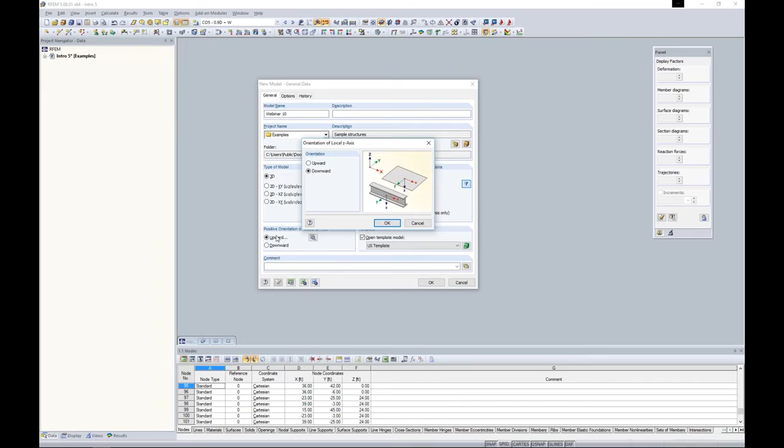The orientation of the global z-axis, that by default is set to upward for the United States install. That's typically what we work with here. And under this details, we'll want to make sure that our local z-axis is set to downward. This is more so important for concrete design. Otherwise, it really doesn't matter in the program. But I always suggest if you have the global z-axis upward to set this as downward for our local member axis.

Over here, we have the Create Combinations Automatically checked on. So when this is checked on, this is telling the program to automatically create these load combinations according to a specific standard that I select here in my dropdown. And this is where you can see that we have the ASCE 7 load combinations, IBC, we have the Canadian standard, as well as Eurocode and several other international standards.

When I have this checked off, then I can manually create those load combinations. They won't be automatically created for me according to the specific standard.

The template model down here is important because I think it's a very beneficial option. For me, I have this US template, and this just has the grid settings set up the way that I like, maybe my units. Perhaps I have some certain materials and cross sections that I use quite often.

Once I'm in RFEM, I can always go to File, Save as Template, and then that template will be available in this drop-down here. This is great for companies who maybe do a lot of similar structures and all start off with the basic type structure to begin with. You can model that basic structure and pull that up in your template model every time and then make further changes.

So now we're ready to jump into the program. So when we first open up the model here, we have our graphics view located in the center of the screen. So as we begin to draw elements within the model, this is where they will begin to appear.

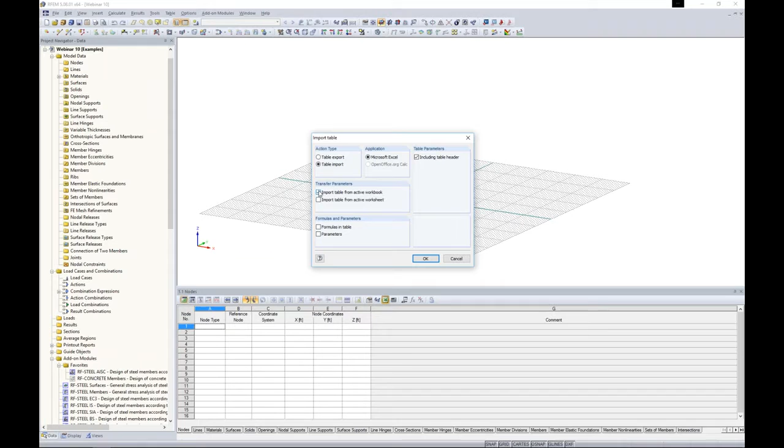For example, we can export this table for our nodes to get the basic layout with all of the correct columns. We can input our data in Microsoft Excel, maybe sort some different ways, and then we can import directly from Excel according to the active workbook and worksheet that maybe we're in the background.

A few other options that we have for modeling are, of course, all of our little tools up here, which we'll be using quite often today. We have our drop-down box up here. For example, we have all of the add-on modules listed according to the different categories such as steel, concrete, dynamics.

We also have the Project Navigator, and the Project Navigator is just another option to input your data. We will also view our results in the Project Navigator. This first tab down here called Data, this would be all of our input data, and here is our long list of add-on modules here.

So you can understand that we serve our customers with the add-on module concept because we really want to create software that caters to you and your needs, rather than charge you a very expensive software where you get all of these add-on modules regardless if you're going to use them or not. For example, you can see all of the different international steel codes that we have here, which probably most of the time users aren't going to be utilizing. So, as I mentioned, a very long add-on module list.

The display tab really controls everything that we're viewing graphically here, including our results after we run an analysis, as well as the input data. Our views tab looks pretty empty right now, but as we begin to generate our structure, this will allow you as a user to create maybe user-defined views, to view certain materials and sections quickly, rather than having to highlight and select them graphically.

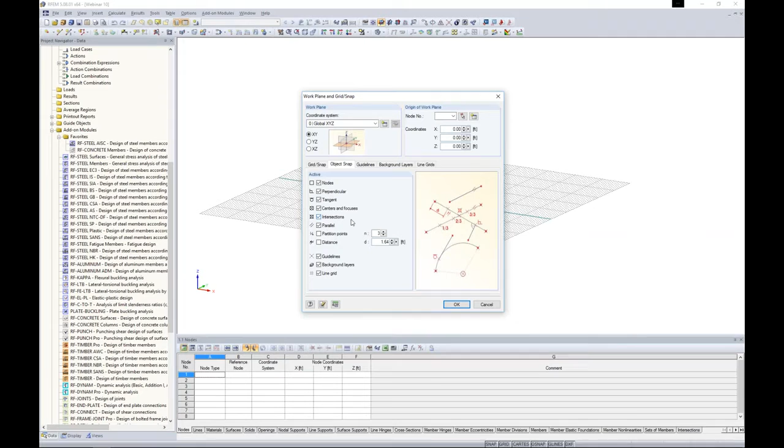This is the reason sometimes I tell users you're almost better off just starting modeling in our program rather than importing a DXF file, because it's easier that way, due to all these different tools that we have. But with that said, you can import DXF files too. For example, under the background layers tab is where we can import in this DXF. And what's nice about the different background layers is I can put multiple layers in here, so maybe I have a different layout for every level of a multi-level story building.

Well, I can go ahead and import in that DXF file at multiple elevations. The line grids option - if I create a new line grid here, you'll notice in the background that we have our typical 2D layout of our project grid. Well, this allows us to do a 3D project grid.

Down here at the bottom, you'll notice some different options that we have. For example, Cartesian, which is maybe more of a square, rectangular, 3D drawing grid. But we also have spherical, cylindrical, and incline. So this really plays an important factor, again, for these not-so-simple geometries that you may have, but you have different snap points in a 3D type environment that you'd like to utilize. Well, that's where these line grids may come in handy.

Under the grid snap settings, this is my current grid that I'm viewing here. Default when you do launch the program is this rectangular grid, but we can change this to polar if we'd like, if we're working with a circular type structure. And right now for Cartesian, I have 50 feet on either side of my origin, but I can also check this checkbox so that the project grid will actually grow with the structure, so it'll move dynamically according to the size of the model. Or if I shrink my structure down, that project grid will shrink down too, so I'm not always having to go back in here and change my settings to something bigger or smaller.

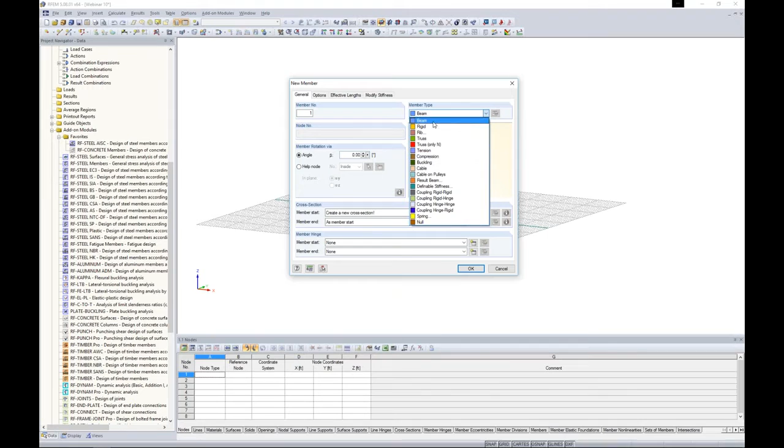And then because of our nonlinear capabilities, we can do things like cables or cables on pulleys. We can get into spring elements. So quite a few other options than just your typical application of a beam or a column.

But with that said, we will choose the member type beam and we'll create a new cross section. So launching our cross section library, you'll notice that we have our rolled sections where you'll find all of the sections from the CSA code, the AISC code, maybe aluminum sections from the ADM. These are all available in our cross section library.

But we also have these parametric thin-walled sections. We have massive sections for concrete. So you'll notice maybe in some other software you're really left with only a rectangular or circular type application for cross section.

But here we can utilize things like I sections, T sections, same with timber sections here. And we can even get into built-up type members. So we're not limited to just those sections directly from the codes, but we can really utilize a wide array of cross-sections here.

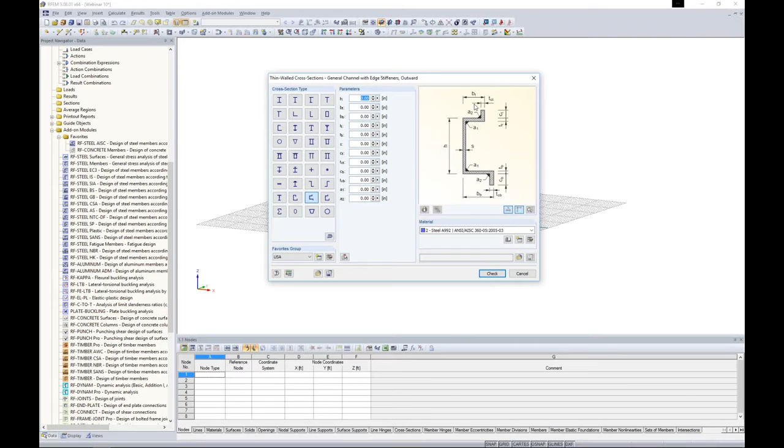For example, if I have an odd thin-walled cross-section here, all I need to do is to define my geometry, and then the program will automatically calculate the section properties for me.

We also have two standalone programs called Shape Thin and Shape Massive, and this is where you can import a DXF file, for example, and that will calculate the section properties for you, and then we can import them directly into RFEM. Those are standalone programs.

For today, we will go with a typical I section, and here is where we can use our filters on the left-hand side. From the first drop-down, you'll see that we have many different standards here. So that's great. If you do a lot of international projects, you'll have access to all these as well in RFEM. This is independent of any add-on modules.

Today, we'll be working with the AISC, and we want to first choose our W shape. Now, we have this long list of W shapes, which just comes directly from the AISC 2014. But perhaps you use a lot of the same sections and you don't really want to scroll through this long list every time to choose your specific W shape.

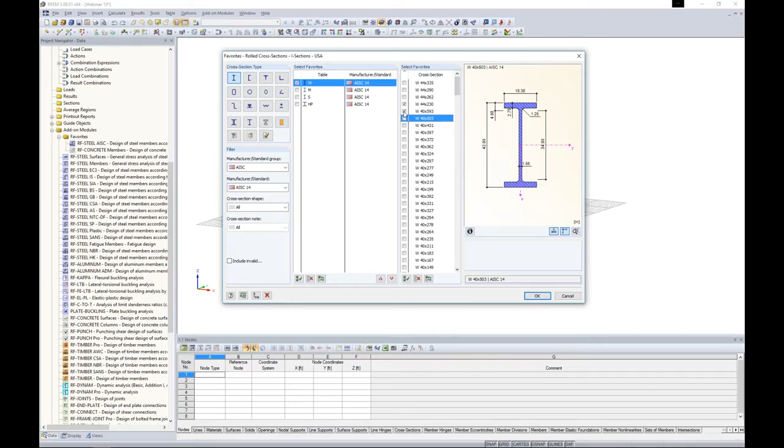Well, this is where we can utilize our favorites group. And with a favorites group, and I choose my edit button here, I can simply check on or check off maybe a set of sections that I use quite often. Then when I click OK and I activate this favorites group, then I'll have these sections available from a quicker list than having to sift through everything.

For today's example, I added a couple W shapes that I know I'm going to be using for this example. So now I have quick access to them.

We can also set the material in the same dialog box. You'll notice in this drop-down menu, the default when you open up RFEM is concrete F'C 4000, and we have steel A992. So for right now, we'll just utilize the default material in the program, but later on we'll have to add in some more materials to that.

The member hinge is set at fully fixed. So right now we will not add in any member hinge, but later on we will do this as well.

So now I'm ready to draw my first member. Well, typically when drawing the member, we need to change maybe our drawing grid and maybe snap to a couple different points. But another useful feature with this dialog box when I'm drawing a new member is to simply specify the length and the direction.

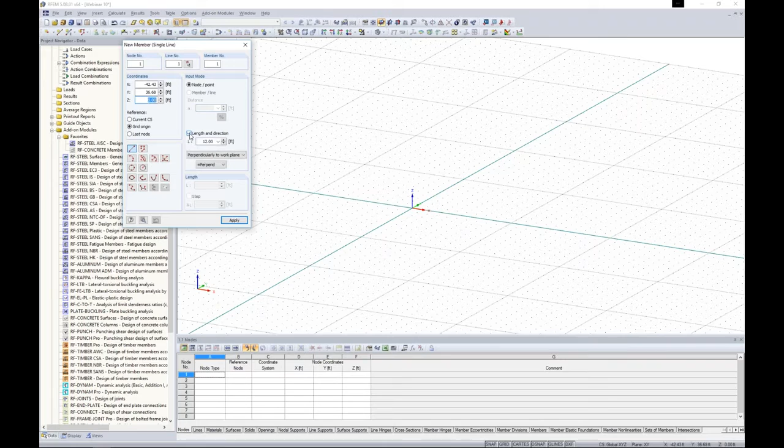So I can set the length to 12 feet here, and I want to draw it perpendicular to my work plane. So my work plane is set in the global X-Y plane. All I need to do is just to click on a couple points here to draw in my first columns. And now you'll notice that the orientation is in the correct direction and my length is set correctly too with that useful feature.

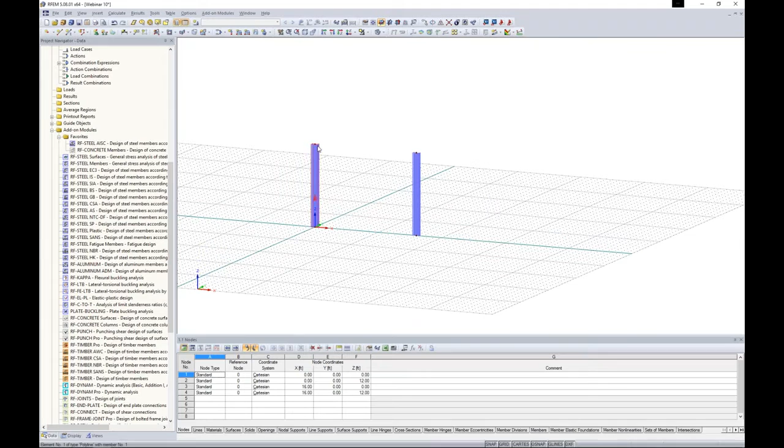The next thing to do is to draw a beam member connecting our two columns. So again, I'm just going to go to my Draw New Beam. I'm going to create a new cross-section. And once again, choosing a rolled cross-section under my favorites list, I'm going to choose a W12 by 40.

I just noticed I used a W12 by 40 here. That's okay, I wanted to actually use a different section, so I'll click on Edit Cross-Section and edit it here to quickly change that 12 by 40 to a 10 by 33. That's my column member, so now you'll notice my columns are 10 by 33 that I've already modeled in here.

My new member will be a W12 by 40. I want full fixity, so still no member end releases. Now I can snap to the top of those columns, and you'll see those green snap points pop up, related to those snap features I showed you when we first opened up the program.

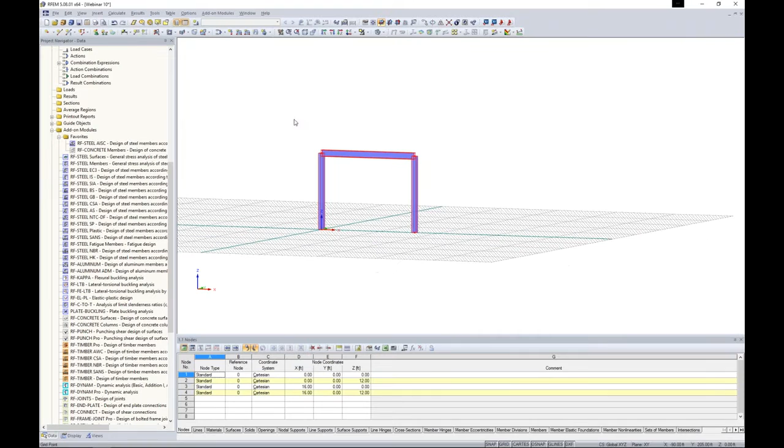So I want to create a couple copies of these. Rather than utilize the Move Copy tool, if I just highlight everything here and hold down my Control key, then we can utilize the drag and drop feature to quickly create copies of this member, additional couple stories here, just by holding down the Control key and dragging and dropping, and the program will do that automatically for us.

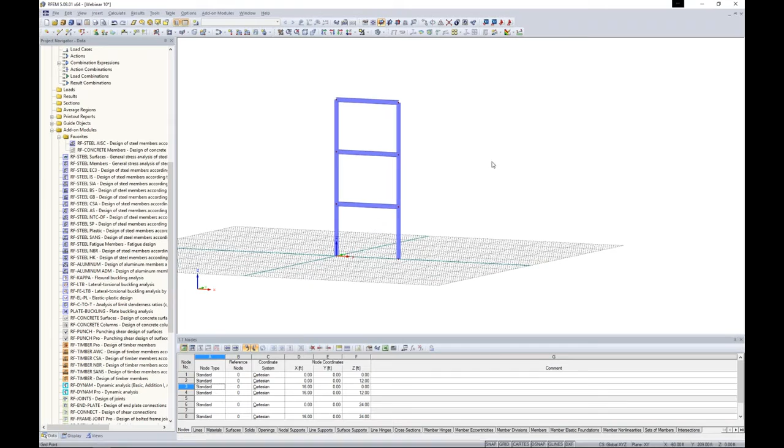Now the next thing I'd like to do is select all of these members, right-click under the Member option, and create nodes on lines with intermediate nodes. Here I'm going to add 2 intermediate nodes, and you'll see that this member is still a single continuous member. These nodes, if I double click, are of the type 'online' - you can see here we have either standard or online, so the program knows to integrate that directly into that member.

Now that we've added those nodes, I'm going to select everything above my bottom two nodes and utilize the Move and Copy tool here. I'm going to create two copies in the global Y direction of 16 feet. We have a special feature at the bottom of this dialog box called Edit Expanded Settings, so when I open up this additional dialog box, we can actually create lines in between our copy nodes, and even assign a member cross-section to those lines.

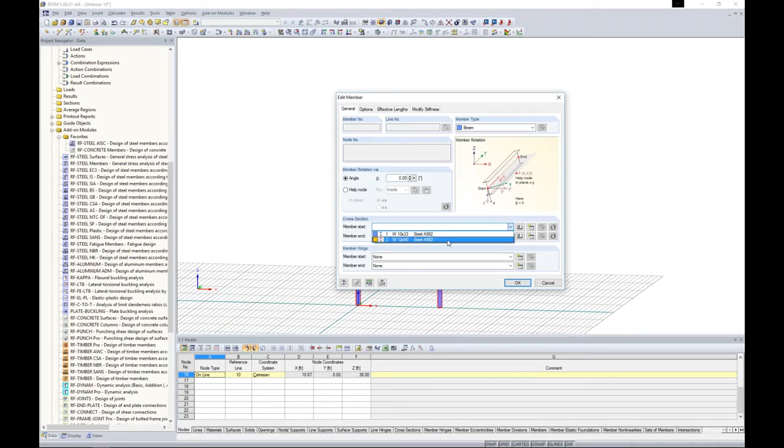Every cross-section or every member is composed of a line underneath it. Because we're creating members between these copy nodes, I want to choose a cross-section from my Edit Member dialog box. I've already defined the W12 by 40 previously, so now that's available in my drop-down box. I can click OK through all these dialog boxes, and now the program automatically created these beam elements between my copy nodes, so I don't have to sit there and draw in all of those additional beams.

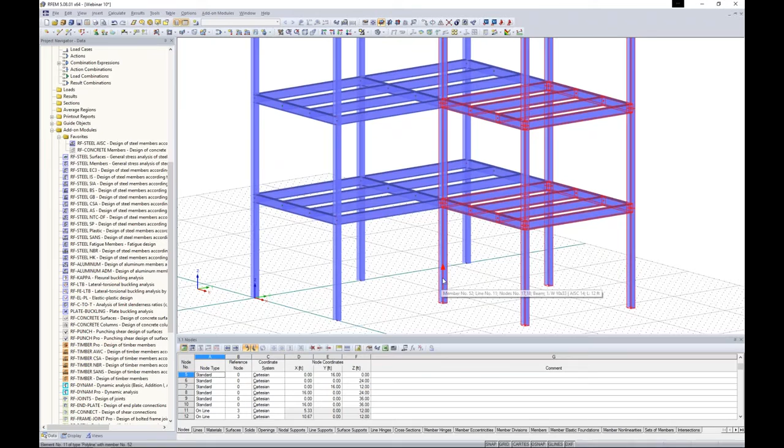Now I'm going to select this rear portion of my steel frame, and holding down my Control key again, I'll make an additional copy right adjacent to it. You'll notice that when I made that copy, I technically created a column on top of this column, but the program's smart enough to merge those together so we don't have any issues with duplicate members on top of each other - a nice feature of the drag and drop. So essentially, we have the basic structure for our steel structure here.

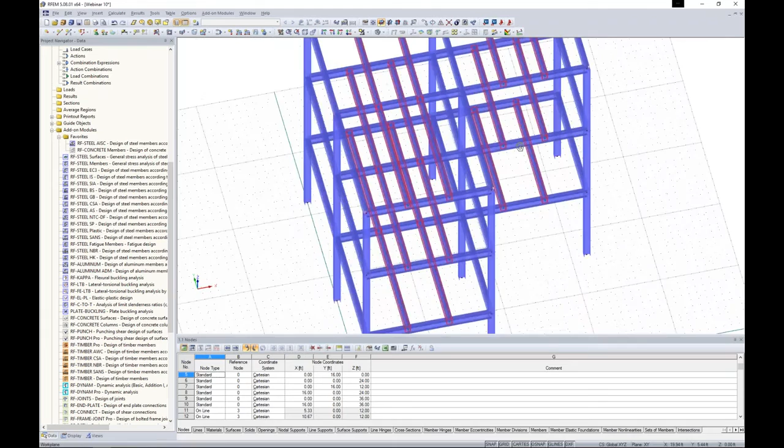Now the next thing we'd like to do is put this into elevation view. I'm going to hold down my Control key to select all of my intermediate beams here, and you'll notice they are highlighted in red. What I can do is right-click under Member and choose Edit. Under the Member Hinge, this is where I'm going to create a new member hinge. Up pops our member hinge dialog box.

We have a nice picture here showing us exactly what our local axes are, so there's never any question about which axis we're releasing in terms of translation or rotation, because this picture shows exactly how we're applying that. So we have the usual release or fixed application for translation or rotation over here on the left, but we can also apply partial fixity, which is very common for a lot of connections.

Maybe we don't have a fully fixed or fully released connection, so we can apply that spring stiffness here for partial fixity. And again, because of the nonlinear capabilities within the program, if we want to apply a nonlinearity to this particular end release, we can - things like slotted connections, for example. We can include partial activity, and if I go into this details dialog box, we can create some type of relationship manually between the rotation and my moment.

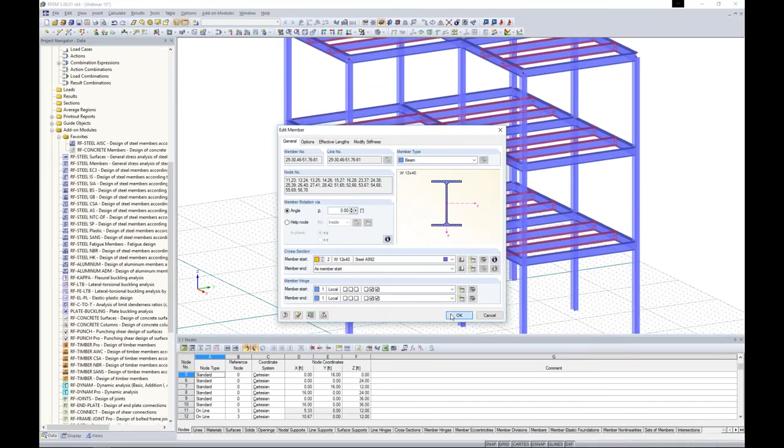Very technical if we want to get into the more advanced features of modeling here, or we just leave this as none and we can apply a simple moment release to the ends of our members. So now for any member that I model in the future, I'll have this simple moment release to apply from my drop-down box here.

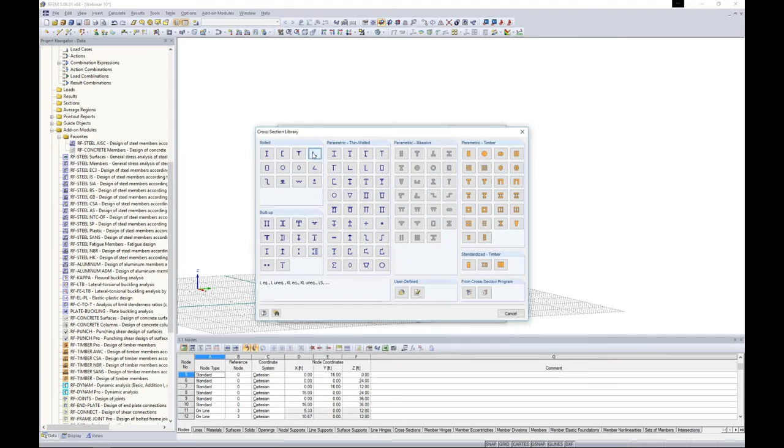You can see that the program applies a little pinned symbol here at the ends of my members, telling me that I do have a moment release at that location. So the next thing to do is to maybe add in a little bit of lateral bracing here. For this, I can once again create a new member. I'm going to go to my cross-section database and choose an angle.

If I deactivate my favorites group, we have all of the AISC sections, whether that's the same measurement for both of the legs here, or different lengths for our legs. Activating my favorites group, I've already added this L5x5 that I'd like to utilize within this application.

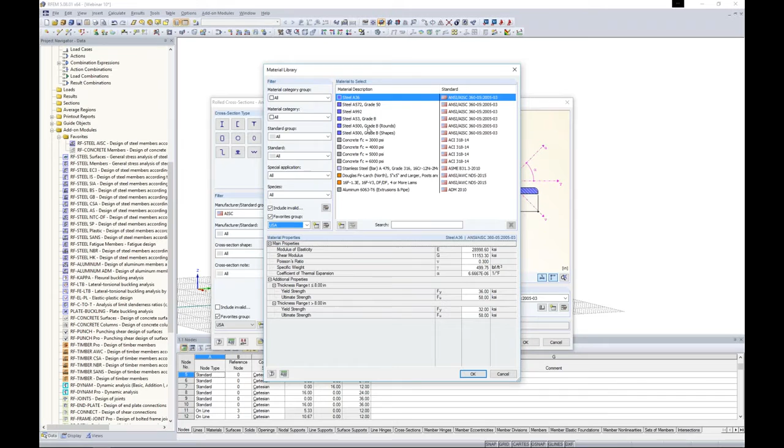Steel A992 is not applicable, so I can quickly create a new material. This material database looks similar to our cross-section database. We have filters over here on our left, and all of the materials from the AISC 360. But I can also activate my favorites group here, and you'll notice I have just a handful of materials that I use quite often for my modeling. Steel A36 is what I'd like to select here. I click OK, click OK.

Now the member type, I'm going to set this as buckling. What does this mean? This means that when this member exceeds the Euler buckling load, the member will actually be taken out of the analysis and the iterations will be rerun. This is to make sure that if a member fails, our structure is still stable. So we'll set this to buckling.

You'll notice that the member hinges is automatically grayed out. This is because we assume that you would like to have a full moment release for any type of tension-only, buckling-only, or compression-only member. We click OK, and now we can zoom in here and snap to our corner points where we'd like to add in this bracing.

Once I have these two braces modeled, I can use my selection tool and utilize that drag and drop feature to add some additional bracing to the structure.

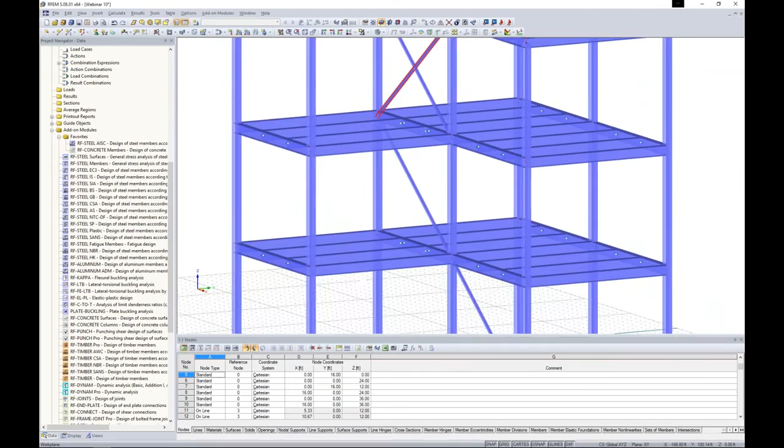Looks like we have some mistakes here. No problem, I can delete that, and we will draw in an additional L member here. All I did was just not snap to the correct place, but you can see how quickly it is just to select your member, delete it, and recreate this, using the drag and drop feature once more, which looks a little bit better.

So now that we're done with our steel structure, what I'd like to do is create an adjacent concrete structure, and we'll connect those two structures once we're done with our concrete application.

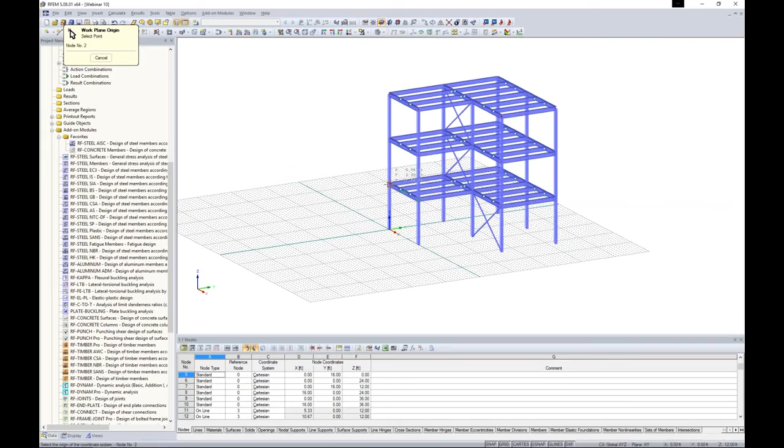Utilizing this tool here to set the origin of the grid or work plane, all I need to do is select this tool, then click on the corner of my structure at the first level, and you'll notice that my drawing grid has now been placed up to my first level. It's nice that we don't have to go into a separate dialog box to rearrange the origin of the drawing grid; we can do so just at the click of a button.

I'll once again turn this into elevation view. What I'd like to do now is add some nodes to my structure. I could utilize this feature, add a new node, and draw it graphically. Or we can use our tables down here. To utilize the tables, you'll notice that I'm under table 1.1 nodes.

I'm just going to scroll down to a place where I have some open space. I'm going to create my first node, and all I need to do is specify the specific coordinates I'd like to apply to this node. So we'll start with -23 in the x, -25 in the y, and z will be 12. Then simply using my down arrow, I'll create my second node at 39, -3, 12, and lastly, my third option will be at 15, -45, and 12.

So just another way that I can create these nodes, as you can see them up here in my graphics view, quickly, rather than utilizing the drawing feature up here. You're probably wondering why I'm creating these odd looking nodes generated out here in space. Well, the next thing I'd like to do is create my surface element, which is going to be my elevated concrete slab at this first level.

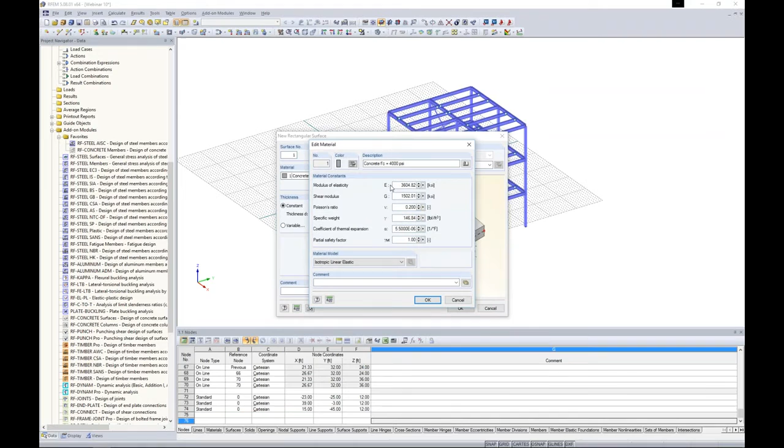For a surface element, the first thing it asks me is what material and thickness do you want to use. 4000 PSI is default within the program, but by using my Edit Material button here and opening up my database, I'd rather choose F'C 5000. I click OK, and now you'll notice that my material has been updated.

My thickness, I would like to use 10 inches here. And the stiffness is set to standard. For concrete, for example, this would be a two-way slab - just a standard thickness and stiffness in both orientations.

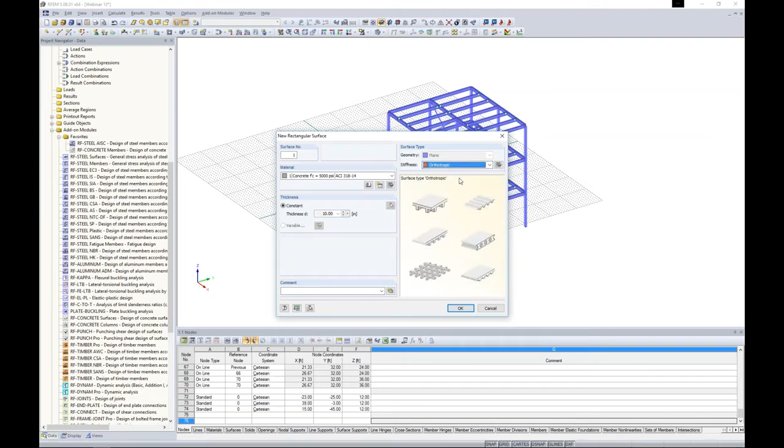But we also have orthotropic here, and when I click on the details button of orthotropic, this gives me a lot more options within my concrete surface element.

For example, effective thickness - if I go to my effective thickness tab, I can specify two different thicknesses in both my X and Y direction for maybe a one-way slab. Then I can even view my stiffness matrix for that particular surface to really see exactly what's going on in terms of stiffness for each element.

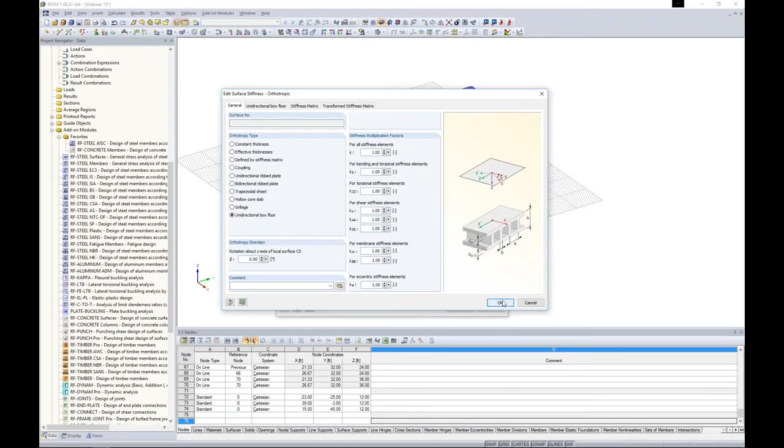We also have a few other options here, such as hollow core slab, where we can simply define some geometric properties and the program will automatically determine that stiffness matrix for us. Grillage would be something like a waffle slab for a foundation, and we have box floor girders as well. For today, we will just cancel out of this and choose the standard stiffness for a two-way slab.

I click OK. So the reason I was utilizing these nodes is because I only need 2 snap points here to create my surface element.

Now I currently have 2 separate elements here. Maybe I'd like one continuous surface for my elevated slab. Well, no problem - if I click on the surface, click delete, then I'm left with all the external lines. I can delete this middle line.

So now I can go to create my surface, but this time I'm going to select my surface using boundary lines. Again, this same dialog box is brought up, but it remembers my settings from last time. I click OK, and all I do is click on those external lines to create my one continuous surface here.

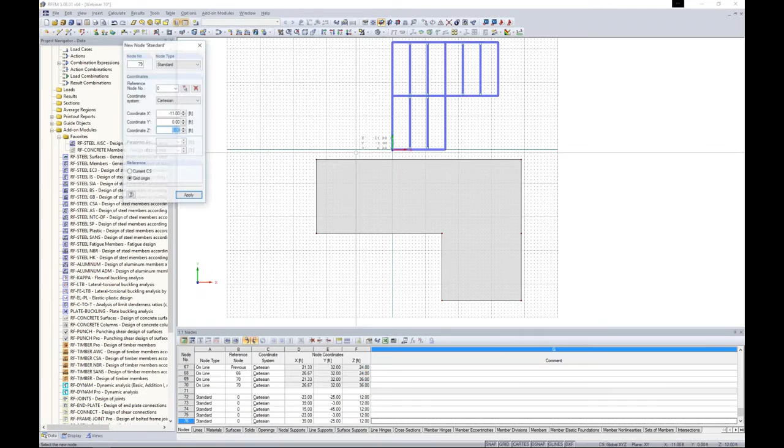Now putting this back into plan view, we probably would like to add some columns here to support our surface. So what I'm going to do is add some nodes, and first I'm going to change this into wireframe - it's a little bit easier to see.

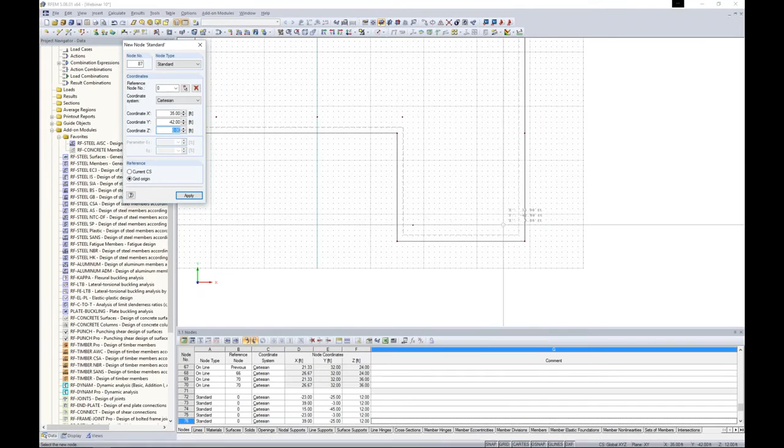So all I'm doing is just clicking graphically now, rather than adding them to the table like previously, where I would like to apply some column elements. I'm just adding them about 3 feet away from the edges here. And you'll notice on the right-hand side, I'm going to skip the application to add a column over here, and you'll see in just a minute why.

Now these are just simple nodes, nothing too special here. So how do we quickly create some columns from these nodes? Well, I'm going to use my selection box, hold down my control key to add or highlight all of these nodes, and then I'm going to utilize my Move Copy tool again.

This time I'm going to create one copy in the global Z direction of -12. I also want to utilize this create members between my copy nodes, but I'd like to create a new cross-section. So here's where I go back into my cross-section library, and I'm going to utilize a parametric massive section. Here is where we specify our basic geometry of 15 inches by 15 inches.

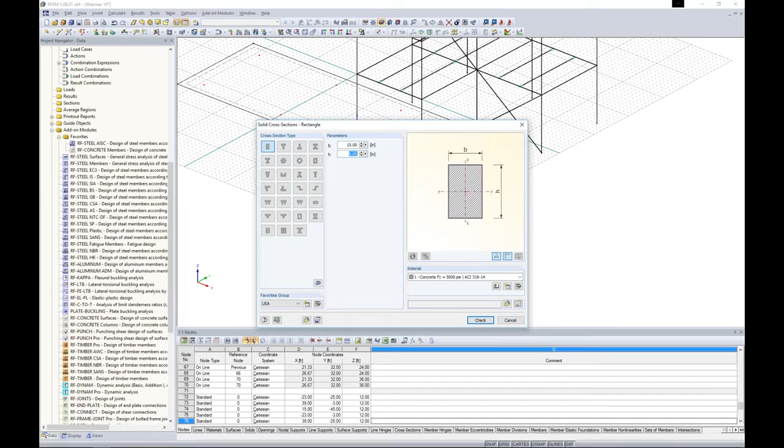I can click my info button to get all of my section properties here that the program automatically calculates. Concrete F prime C 5000 is good. I'd like full fixity here. I click OK, and I click OK through all these dialog boxes.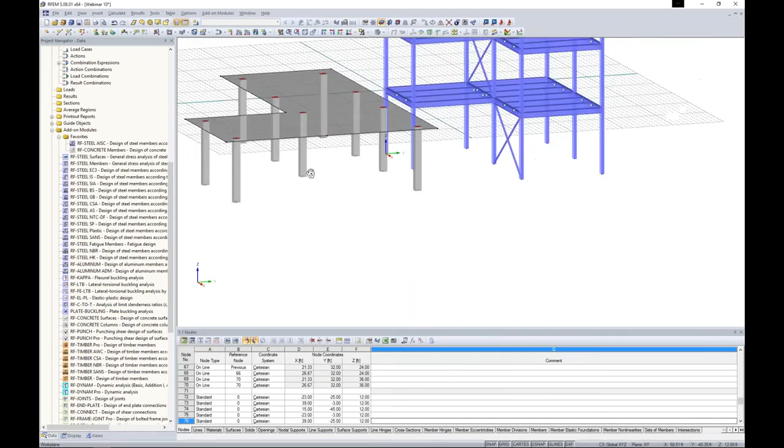Turning this back into the rendered version, you'll see that my columns were automatically created using that Move and Copy tool. So the next thing I'd like to do is maybe create a second floor. I can hold down my control key, use my drag and drop feature once again, and now I have my second floor here. The reason I skipped the column over on this side is because maybe I'd like to create a rib type beam underneath my slab here.

The first thing I'm going to do is draw a line element. Now, a line element is not a member. We can create a member from a line element, but it's just a simple line. So here I'm going to snap from the top of my column and also on my first level here. Now, what do I want to do with these lines?

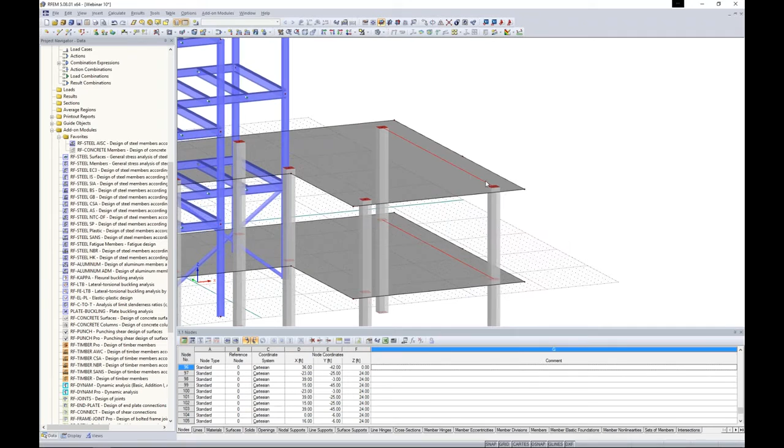If I hold down the control key and select both of them, I can right-click to edit the line. Like I mentioned, this is just another way to create a member, but every line or every member is created from a line. So we have a member tab here where I can select the option available, and I will create a new member type, but this time it will be type rib.

Now I need to go into my detail settings here, and the first thing the program's asking me for is where is the alignment of this rib member in comparison to the surface element? Well, I'd like to move it onto the local positive Z side of the surface, which you can see my little picture updates here.

We can actually take into account for both the analysis and design portion of this rib some effective widths. We can either do this automatically with L/6 or L/8, or we can manually enter them in. So for side 1, I'd like to choose L/8, which will be this side over here. For side 2, I'm going to choose manually 3 feet, and that's because I'm at the edge of my slab element here. I click OK.

No member hinges will be applied here. And what I do want to do is create a new cross-section quickly with my parametric massive shapes. This time it will be a 15 by 22 inch deep member. Click OK. Now you can see that beam member was dropped down below the surface, but it will be taken into account with the effective width of the surface itself.

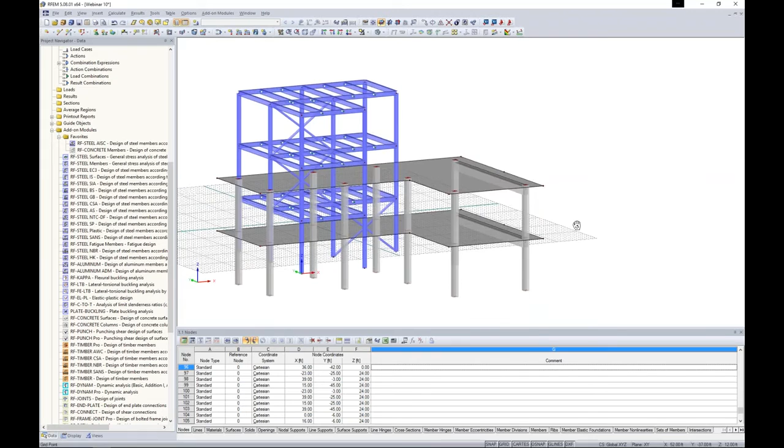Now, all the program's doing is dropping little rigid links along the length of the member at every FE finite element for the surface. Okay, so one other thing we need to do before loading our structure is we need to quickly apply some nodal support.

So I have a quick button here to apply a new nodal support, but I can also utilize my project navigator here. You'll notice here's my cross sections within the program, here's my surfaces, here's my material. So all of your input data is available here as well.

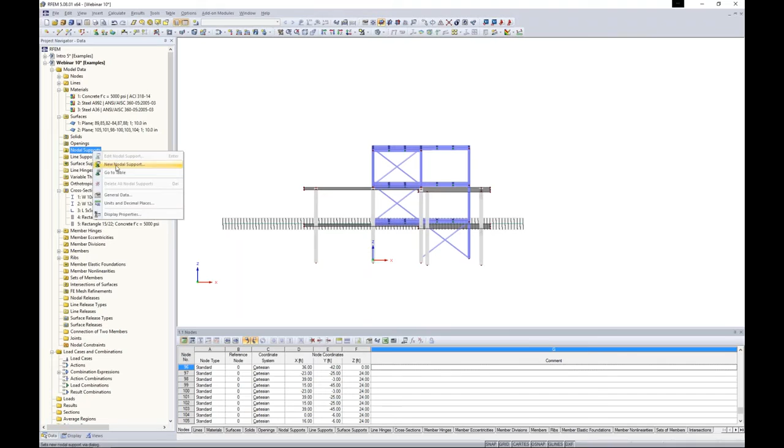So under the option Nodal Supports, I'm going to right-click and choose New Nodal Support. Again, this should look similar to the member end releases that we utilized before. We can either set this as fully free or fully fixed in terms of translation and rotation.

We can also do partial fixity. And then the non-linearity capabilities of the program will allow us to take into account things like partial activity, maybe sliding or friction that we'd like to take into account. All of that can be done. For us, we will just choose a fully rigid connection, and then I can choose the bottom of my structure and the nodes graphically, click OK.

I'll turn off my grid settings down here at the bottom, and now I have my structure with the nodal supports applied. One other thing we'd like to do is to quickly connect our two structures here.

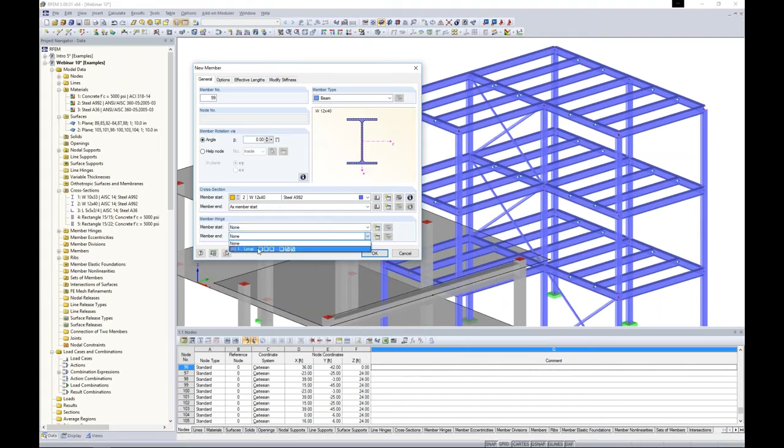We have the member type, we'll choose beam here and selecting a W12 by 40. The member start, I would like it to be fully fixed, but the member end, I want to apply that moment release. I click OK, and then you'll notice that I have those snap points, and automatically the program recognizes what is perpendicular to the surface here.

So I don't even necessarily have to create a new node, but I can utilize those snap points. Okay, so the next thing we'd like to do now that we've automatically created the generation of our structure is to apply some loads.

Under new load case, we create our first load case and give it a description of dead load. The action category is important because this tells the program how to apply it to the different load combinations according to the ASCE 7. You'll notice that for dead load, self-weight is automatically checked on, so this is how we can account for the self-weight of the structure automatically based on the element's densities.

We create our second load case. This one we will call live and give it an action category of live. You'll notice self-weight is checked off, otherwise we'd be accounting for it twice. Lastly, we will create a third called wind and apply it to the action category of wind.

Under combination expressions, the program is going to create both LRFD and ASD combinations. I can click this info button to see exactly what combinations are applicable from section 2.3 of the ASCE 7. Under load combinations, this is where my load combinations will actually be generated for both LRFD and ASD. What's nice is only the applicable load cases are applied here, so we're not having to sift through snow loads or earthquake loads that we haven't applied to our structure under the load cases tab. We only have dead load, live load, and wind load available here.

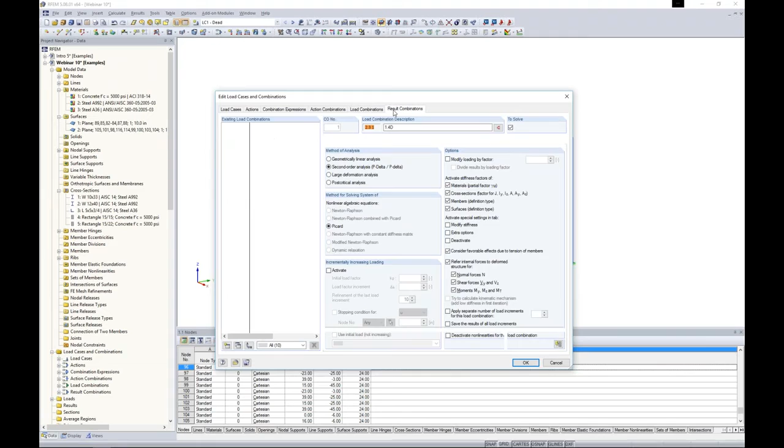Result combination is nothing more than an envelope solution for all of our LRFD and ASD combinations that were created automatically. Now that we have our load combinations generated, I'm going to use my drop-down box to make sure I'm under dead load, so any loads I apply on the model will be under that load category.

The first thing to do is apply a new surface load. Under surface load, you'll notice we have the load type force, of course, but also things like temperatures, axial strains, even rotary motions. Then you need to specify the load direction—we will stick with the global Z direction. As I switch through these different options, my little picture updates to show exactly how I'm applying this load to the structure. We will apply a magnitude of negative 0.1 kips per square foot.

I click OK. All I have to do is click on those single surface elements to apply that dead load to my elevated slabs. In a similar manner, we'd like to apply a dead load to our member elements, and we could certainly apply a single member load in kips per foot on each one, but rather I'd have the program determine the tributary areas for each member and do that automatically.

Which we do have a feature for. Under Tools, Generate Loads, you'll see we do have snow loads and wind loads, for example, according to different standards such as ASCE 7. But these snow load and wind load generators require a structure that looks similar in geometry to this. Once you get outside of this realm, you can no longer use the generation of these load combinations for the application to the structure.

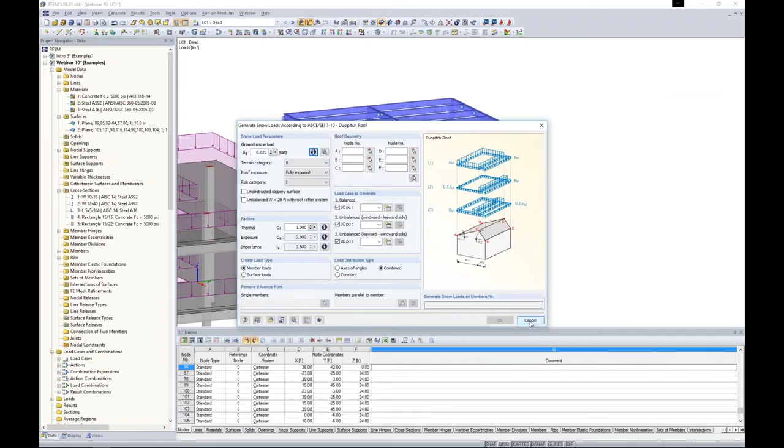But if you do have a structure similar to this, it's great because we can choose a place on the map where we'd like to apply our ground snow load, give it a few other factors, and the program can automatically create that for us. For today, as I mentioned, we don't have a structure like that—we have a little bit more odd geometry.

So under Tools, Generate Loads, we'll choose this option from Area Loads via a plane. Now, similar to what we saw with the surface load, we needed to give it the area load direction, and the global Z direction is what we'll choose.

And the magnitude will be negative 0.1 kips per square foot. What I'd like to do now is choose my corner nodes, where I'd like to apply this area load. And there's a couple nice features about this.

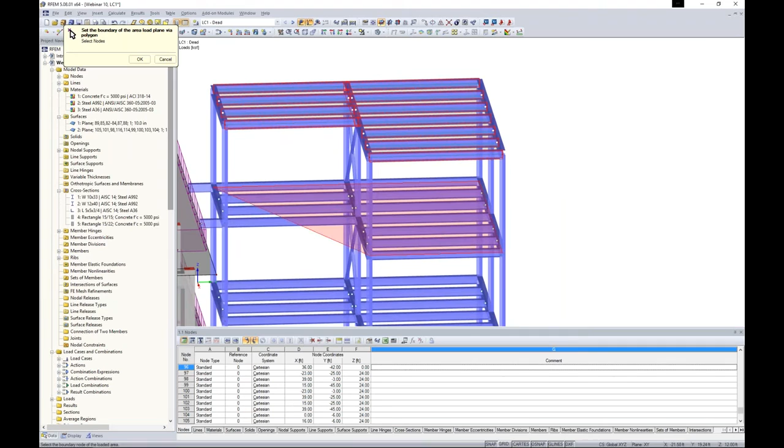Number one is that it doesn't have to be a typical rectangular application - you'll notice I'm choosing a polygon application for an odd geometry, for example. Number two is that I'm applying it to different levels here, closing off each plane individually. So I can apply this to not only my first level, but also the second and third at the same time - all the red members are highlighted, showing where this area load will be applied.

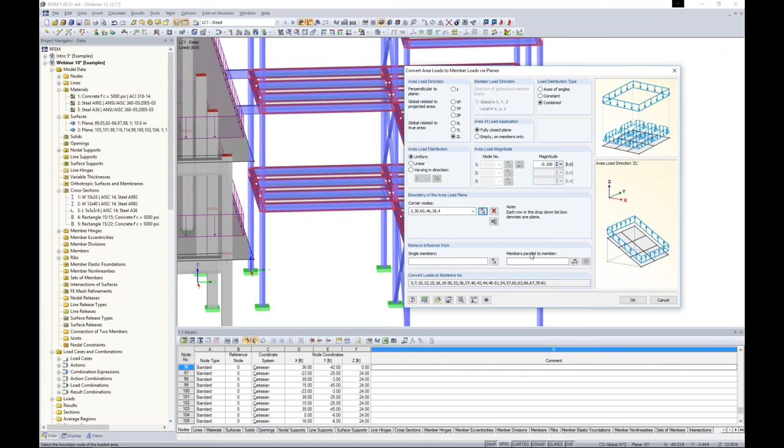But now I can exclude members parallel to a certain member. So I can graphically choose, let's say, this member here. I click OK, and the program will automatically create this area load, which we can see by this faint gray line here.

And maybe I'm interested to see how this load was applied to each member. I can right-click, display separately, to see that I'm only applying it to these members in the global Y direction, and I can view the magnitude by zooming in here as well. So just a quick application so the program can automatically figure out these tributary areas.

In the same sense, I'm going to apply a live load, again with a surface load. All I'm going to do is change the magnitude to negative 0.05 kips per square foot. Click on my two surfaces. Under Tools, Generate Loads from Area Loads via Planes.

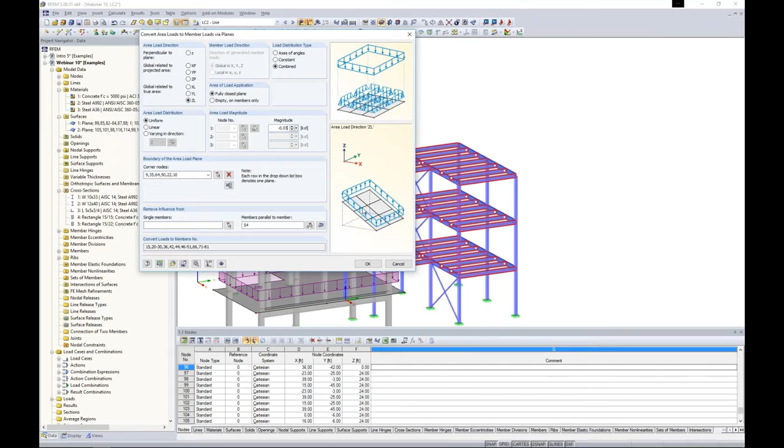The program remembers all of my settings that I just previously set for my dead load. So all I have to do here is select negative 0.05 to change my magnitude. I click OK, and all of those loads are automatically generated for me. I can right-click to display in a little bit of a nicer view here if I'd like.

Lastly, we want to apply some lateral loads here according to wind loads. The first thing I'm going to do is choose a new line load. A line load is different than a member load, which is right next to it, because a line load would be applied to a surface element here where we don't have a member at this location, but rather we have a line element.

Again, this should look familiar to what we've seen, maybe a little bit different view, but all we're doing is applying a load direction in the global Y direction this time and giving it a magnitude of 0.3 kips per foot. Then all I have to do is click on these different line elements to apply that lateral load.

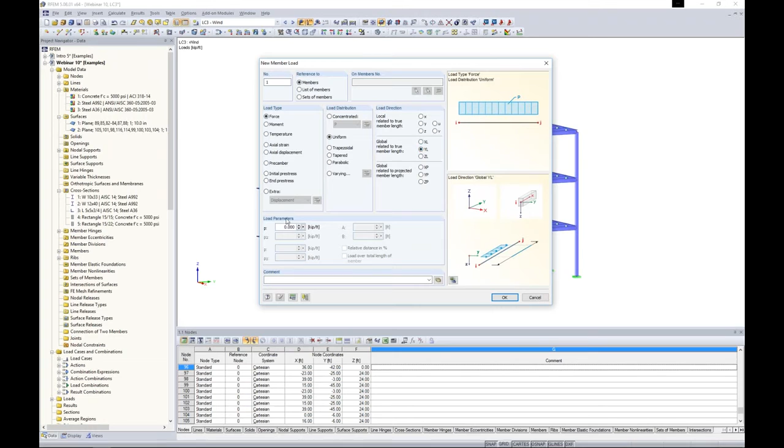Maybe for my members up here, I'd like to apply a member load though. So right next to line load, I choose member load. And again, a few more options here in terms of temperatures and axial strains. For this, we'll stick with the global Y direction and apply this as 0.3 kips per foot. I click OK, and I click on this single member.

So lastly, for our wind load, we probably would like to apply member loads in a similar fashion to these vertical columns as well as our steel structure and our concrete structure. Going back to member load, this is where we can utilize maybe the trapezoidal function, and you'll notice here that we have the tapered option.

We can even get into parabolic type load application. And in most of our loads that we manually apply, we have this varying option. If I go into the details of this, you'll notice I can import directly from Excel multiple locations along my X length of my member as well as the load magnitude.

So just for more complex applications, for today we'll stick with this trapezoidal load. P1 will be 0.1 kips per foot, P2 will be 0.3, and I'd like it over the full length of the member. So now I can just click on my members here.

Now you'll notice as I'm clicking on these members that typically with wind loads, I would like to apply a higher magnitude at the top and lower magnitude at the bottom. Well, that's fine for over here, but it looks like our concrete members are opposite. So I could easily double click on these member loads and switch them around, but you'll notice that my columns start by the big red arrow here at the top and finish down at the bottom, whereas my steel are opposite of this.

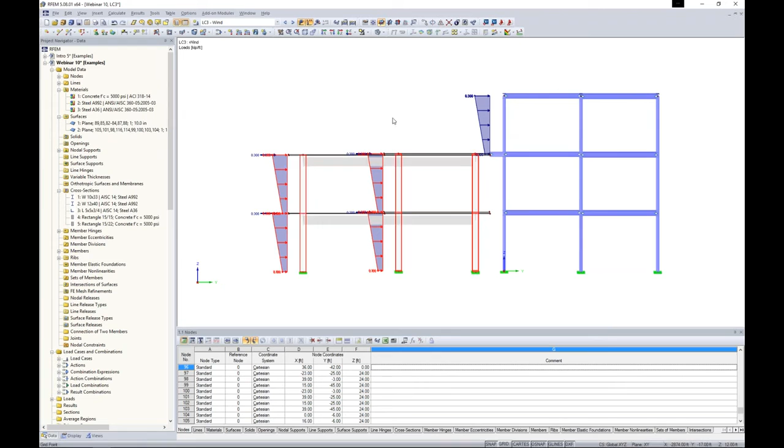Maybe I'd like them in the same orientation. For this, I can highlight all of my columns, right click, and choose under Member to reverse the member orientation. Now my loads look more similar to my steel. That's just another option you have if you want to quickly reverse the I and J ends of your members.

Now with that said, you can see that all of our different load combinations with the correct load factors will be applied graphically here as we scroll through the different applications.

Now I'm ready to run an analysis. The first thing I want to point out when we run an analysis is under Calculate, FE Mesh Settings, the global mesh settings are set at 1 foot. I think this is fine for maybe an elevated slab, but you can always change these to something smaller as well. We do have FE mesh refinements that you can create about a particular node or line within the element—a bit more advanced feature that we won't get into today.

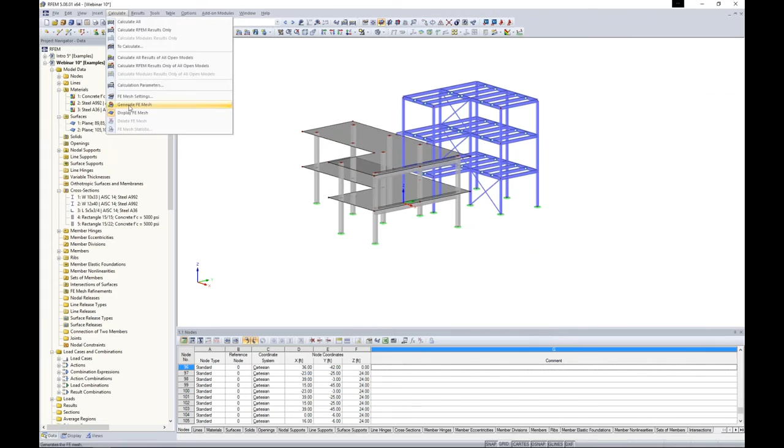If I go to Calculate, Generate FE Mesh, and turn this into wireframe view, you'll notice everything was automatically created for me. I never have to worry about tying these nodes into elements or making sure my FE mesh is submeshed further—the program does all this automatically. If I were to make any changes within the model, move these columns around, everything will be updated accordingly.

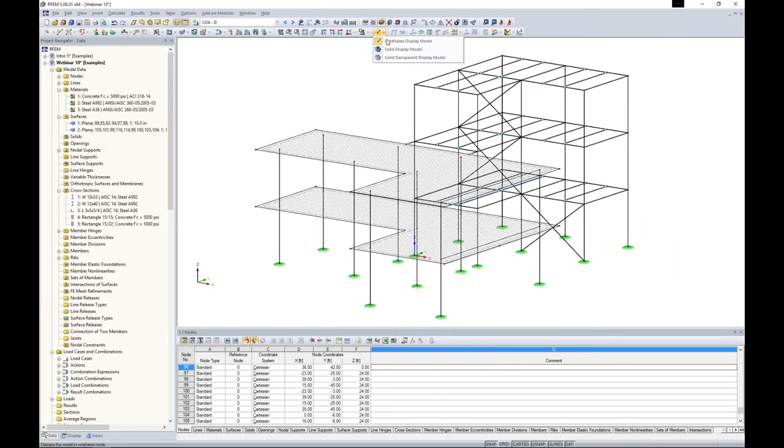Okay, so we're now ready to run an analysis, and I can simply go to Calculate, Calculate All. So now the program is running through all of my different load cases, load combinations, and result combinations. It's doing a nonlinear analysis, and the reason why is because we want to take into account both big P-delta and P-little-delta.

We also get a little diagram here showing us our iterations versus our max displacement. If you notice that this is starting to just increase and increase and increase, then we probably have some type of instability within the program.

After the analysis is run, the program automatically jumps to our Results tab available in our project navigator. Here is where we can graphically view all of our different deformations, for example in the different translation and rotation directions. Under the Display tab and under the Results tree here is where we control everything that we're viewing graphically for our results.

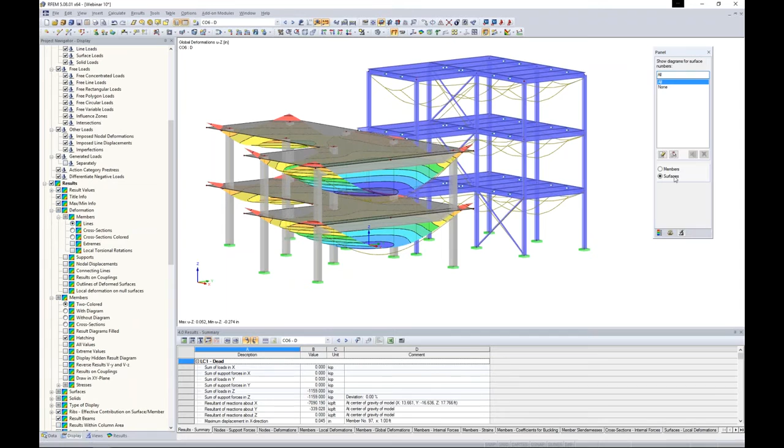So feel free to change this around if you don't like the look of some of it. Back under the Results tab, we also have the options to view members. For example, maybe I want to take a look at this column line here, and I can create a specific visibility. When I'm looking at my members tree, I can activate maybe my axial loads within my columns I'm interested in. We can take a look at moments here, shear forces—everything that's of interest probably for our design purposes.

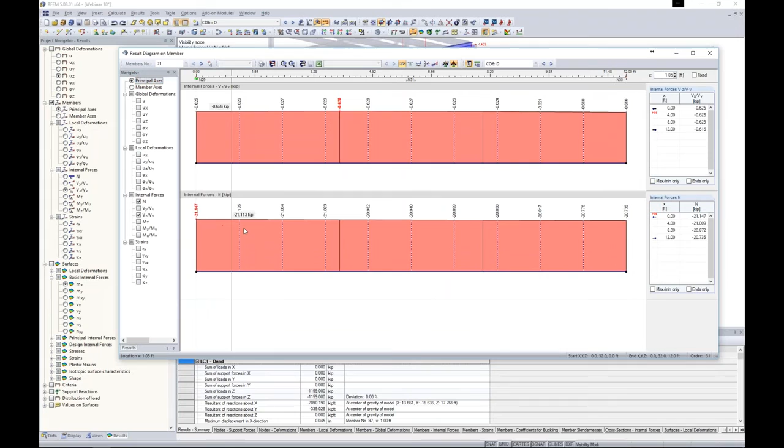I can always right-click on any one of these and choose Results Diagram. When I choose Results Diagram, I can turn on those same diagrams, but this will give me a little bit more of a useful look at the magnitudes along the length of my members for my internal forces. We can also scroll between the different load combinations here, and we can even change members with this drop-down box.

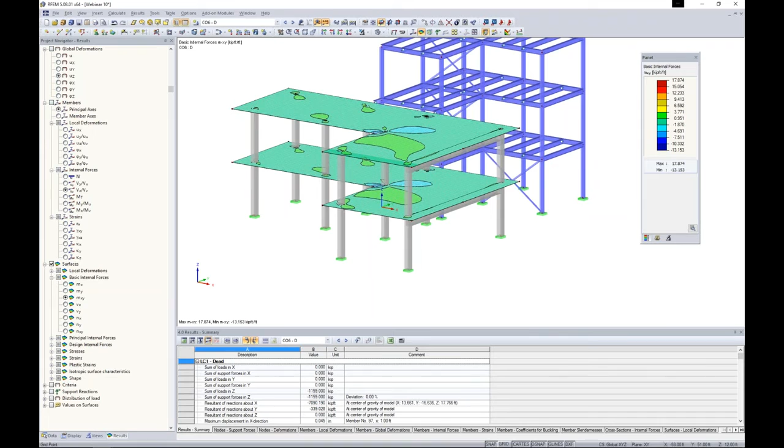Lastly, we have our surfaces available. If I cancel out this visibility mode and zoom out, let me turn off my members. For our internal forces here, these are important for concrete design purposes—we give these to you in terms of contours. We also have section cuts, but again I won't get into the details of that. We can view our surfaces here, such as MX, MY, MXY, that are important when we're looking at reinforcement design of the surface.

So with that said, everything we've done up until now has been in RFEM alone—this is the analysis portion. I want to make the clear distinction that I'm now going to jump into one of the add-on modules. Back under the Data tab, now that I have all my internal forces, I'd really like to take a look at design per the AISC. So I'm going to launch my add-on module, Steel AISC, and you'll notice the add-on module is nothing more than a simple dialog box within RFEM.

All of my materials, my cross-sections, my geometries, my member lengths are all brought into this add-on module, including our load combinations here. All I'm doing is specifying a little bit more information related to that specific standard to do my code check. So the first thing I do is use my drop-down to select LRFD 2010.

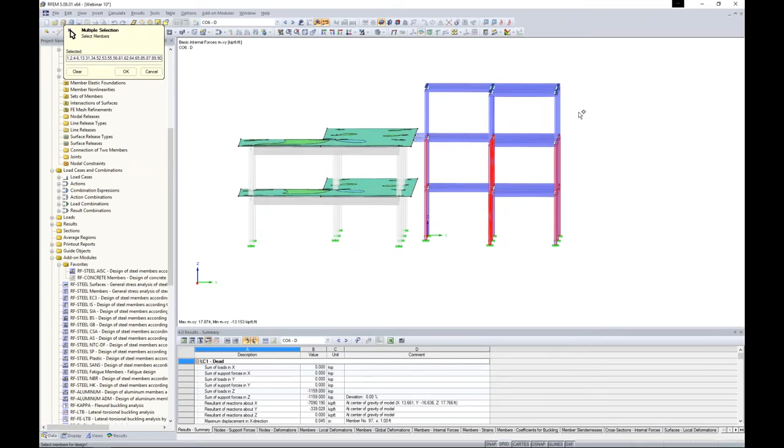My ultimate limit state design, maybe I'd like to select all of my LRFD load combinations. For serviceability, I can select my ASD load combinations. My members, I select graphically for design, which I can do by selecting all of my vertical column members. And maybe I'm not so interested in these braces, so I'd like to exclude them from my analysis for now. And then I just simply work down my list here.

Going down to materials, steel A992 was brought into the add-on module. Cross sections, same thing, my W10 by 33 is available. Intermediate lateral restraints, this is just if we have any top or bottom flange bracing along our member length, we could specify that here.

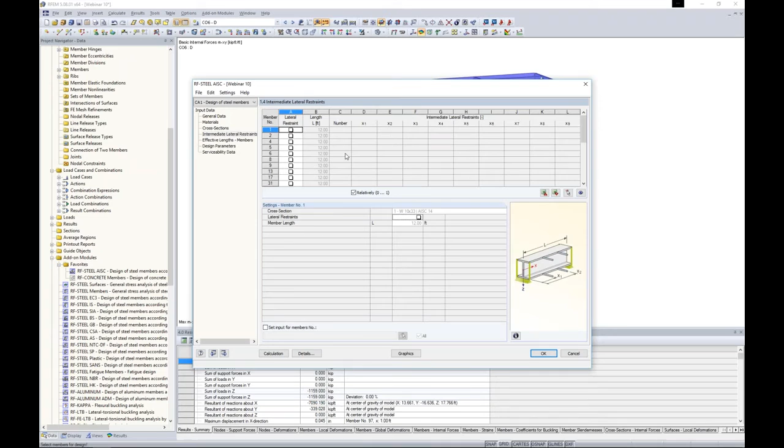Design parameters: effective lengths is going to be buckling about our strong or weak axis with our unbraced member lengths, which default to the full member length. We also have torsional buckling and lateral torsional buckling that we can take into account.

Design parameters, just a few more variables that are in regards to the AISC 360, such as the C sub B factor. Again, most of the stuff you maybe just leave at default and what the program calculates for you.

Lastly, serviceability data. We can check deflections according to a specific deflection ratio. Under my details tab is where I have my limiting deflection set at L over 360 for simply supported members and L over 180 for cantilever members. I can adjust this equation or this ratio if necessary.

And here, all I do is again select my members, and I'm going to select all of my columns graphically. And we'll have to exclude the braces because I did select them within my selection box, but I don't want to check the serviceability for them right now.

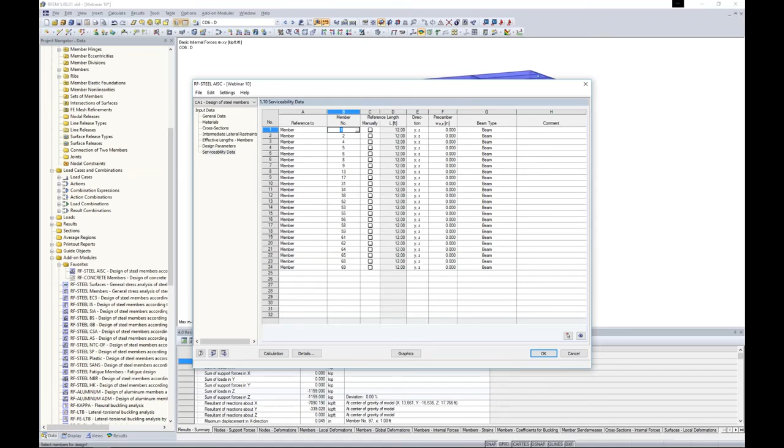The full member length is default here for the reference length. I can add in a pre-camber if I'd like to. And then I'm ready to run my calculation.

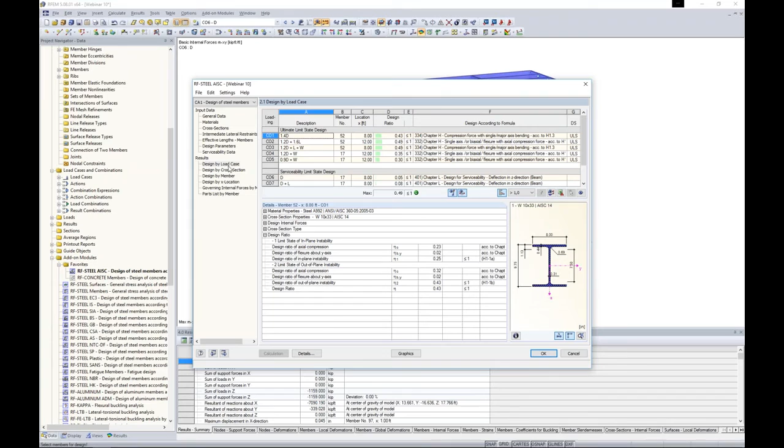You'll see that this solves within a split second, and that's because the internal forces have already been solved for within RFEM. All it's doing is taking those internal forces into this add-on module and applying the code checks to those specific members. So our results are available here, design by load case, design by cross-section.

We can even view the design by member. What's nice is that as I scroll through this table in my add-on module, you'll notice that I'm synced up to the graphics view within RFEM. Even this big red arrow tells me exactly where my internal forces that are controlling for this specific code check are.

One very powerful feature, which I always point out almost every webinar, because I think this is a little bit more unique to our program, is that we don't just give you our controlling code check here with our big green smiley face because we are under 1.0, but we give you the code check that is applicable throughout the entire AISC for that specific member. So you'll see Chapter E, Chapter F, Chapter G, all of those checks will be given to you here.

And even more so, we give you all of the variables that go into play for this, as well as the variable references directly to the code. So again, just very powerful in us trying to be as transparent to you as possible where your numbers are coming from.

We can also view everything graphically here, and when we're in the AISC module, which you can see from our drop-down list, RF-STEEL AISC, we can view either the ultimate or serviceability cases graphically if we choose to do so. So that's really all I wanted to show you in terms of the steel design.

Again, I know I flew through this. I did a complete one-hour webinar devoted to only steel design and this add-on module, and if you'd like to see that in much more detail, I want to reference you again to our YouTube channel.

In a similar sense, I want to launch our RF Concrete Members module to just show you real quick what concrete member design would look like. You'll notice that the add-on module looks pretty familiar. That's the great thing about our program: a lot of these add-on modules look very similar.

Once you learn one, all the rest are pretty intuitive to work through. The first thing we do is select our standard ACI 318 from our drop-down. For strength limit state, I'll select my LRFD load combinations. For serviceability limit state, I'll select my ASD load combinations. Then I just move slowly down my list here.

Materials, F'c 5000 is applicable. You'll notice these steel options are red. That's because they cannot be applied in a concrete design add-on module. That makes sense, no problem.

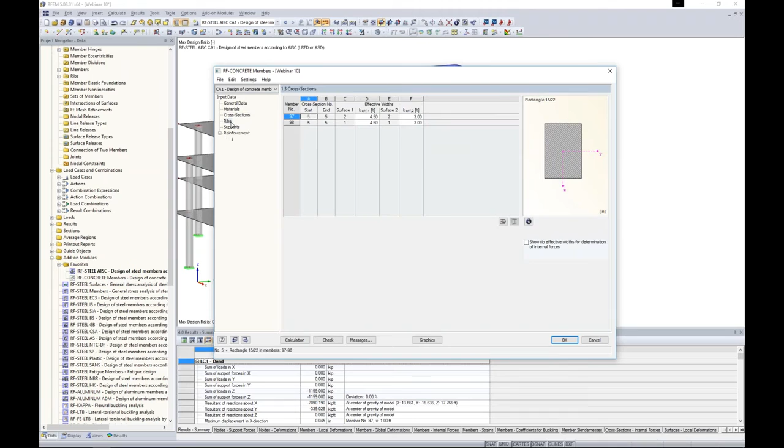Cross sections, same thing. The only ones applicable are our rectangular concrete sections here. The program is smart enough to recognize that we have some rib members, and it will take into account the effective widths when we're looking at design purposes, which we'll see in just a moment.

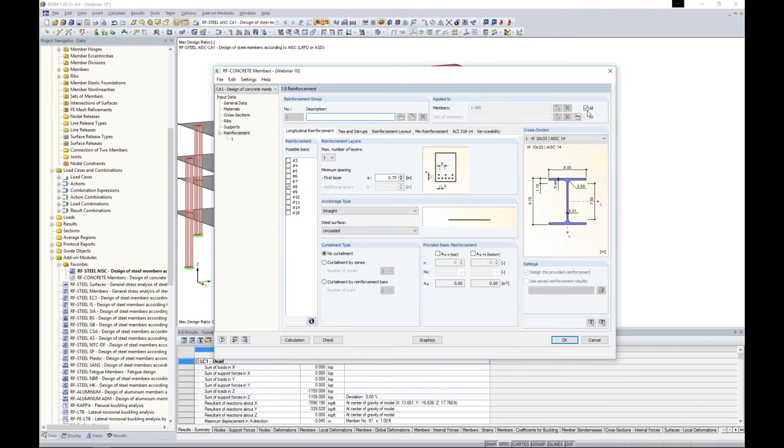Then under the reinforcement tab, this is where we specify the different longitudinal and shear reinforcement factors. The first thing we want to do, you'll notice all members are being designed. Well, we have a steel section pulled up in our concrete add-on module, which will probably give us an error if we try to design that. So instead, I'm going to graphically choose just my two rib members here. I click OK, and now here are our rib members shown in our preview box.

So working from left to right, I want to choose my longitudinal reinforcement. Maybe I'd like number 8s and number 9s. I can choose maybe two layers for my longitudinal reinforcement if that's needed. The anchorage type, we can change this to straight or hook. For bend, you'll notice again the picture updates here according to whatever selection we choose.

Ties and stirrups, same concept. Maybe I'd like to choose number 4s. We can also control the spacing of the shear reinforcement down here at the bottom. The reinforcement layout is just cover spacings, and the little picture here will update to show you exactly what variable you're setting within this entry on the left for our cover.

The reinforcement layout has some different options, whether we want an optimized distribution or maybe we want to set a ratio of our top reinforcement versus our bottom reinforcement.

An important thing to know is that this is the design internal forces. Right now we have everything checked, so the reinforcement will be designed for axial forces, shear forces, moments, as well as torsion. We can always uncheck one of these if we don't want to take them into account.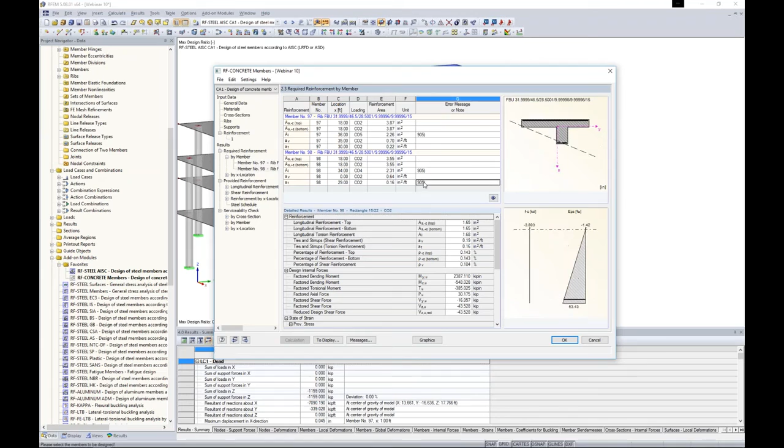We can always click on messages to see those code references of exactly what these little notes within the program are trying to tell us.

Then we'll get provided reinforcement. This is nice because required reinforcement is okay - this is just an arbitrary number - but we'd like to see the applicable bars within the design to see how we're going to meet that required reinforcement. So we have both longitudinal reinforcement and we can see our shear reinforcement here. Now we have pretty close, tight spacing here of our shear, probably because of some torsion effects, which we could always go back and choose to uncheck for our internal force design.

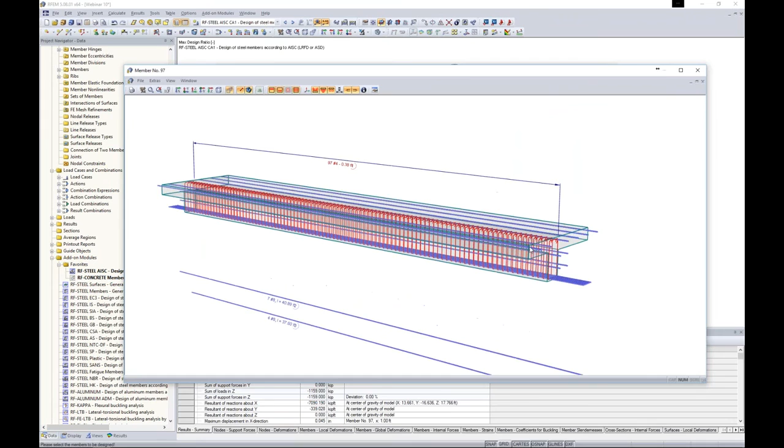Now, if I choose 3D rendering here, this will give me a nicer view of my reinforcement throughout the member. Maybe I'm not happy with one of these - well, I can always double click on one of these reinforcement settings and adjust my bars here, including the location of the spacings along the bar length. So very, very powerful when it comes to our reinforcement for concrete.

Okay, so exiting out of this 3D view, we also have our serviceability check. This is more so in table format. Looks like we're a little bit overstressed - or not overstressed, but our limiting crack spacing for our torsional reinforcement is exceeding the capacity here.

Well, this is a good example here of a live webinar. It was passing before, but it looks like now we aren't passing, so maybe we'd want to go back and address some of the spacings for our longitudinal and shear reinforcement to meet those code standards. But again, this will just show you when you aren't passing and how to better change the input data to meet that.

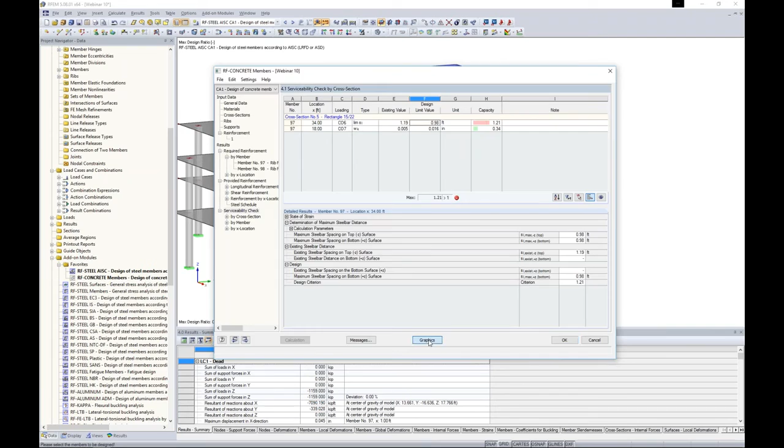So for now, we'll forego this and jump into our graphics view, which I just lastly want to show you. Again, we're still within this RF concrete members here, which means we're still looking at the add-on module. We're just viewing graphically some of our results.

So here's where our required reinforcement is. And you'll notice that maybe I could create a little section view of my two members here that I designed for, and I have my AS top required and my AS bottom required.

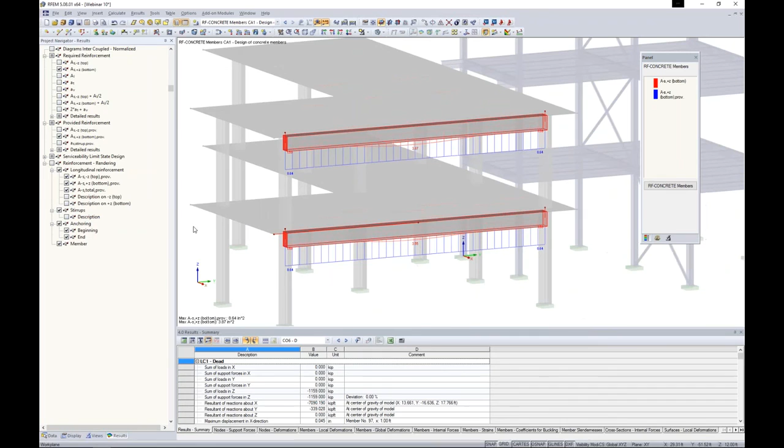Now maybe I want to compare that to my provided reinforcement. So for example, I can turn on my AS bottom, which is this nice diagram given in inches squared per foot, and I'd like to see how my provided meets the required. Well, you can see that it looks like we're well over the required reinforcement ratio here. So you can view everything graphically.

What's also nice is that if we turn off these diagrams, we can also view a rendered shape here of the reinforcement within this particular model, even with the rib section. So we can always add this to our printout report if we see fit.

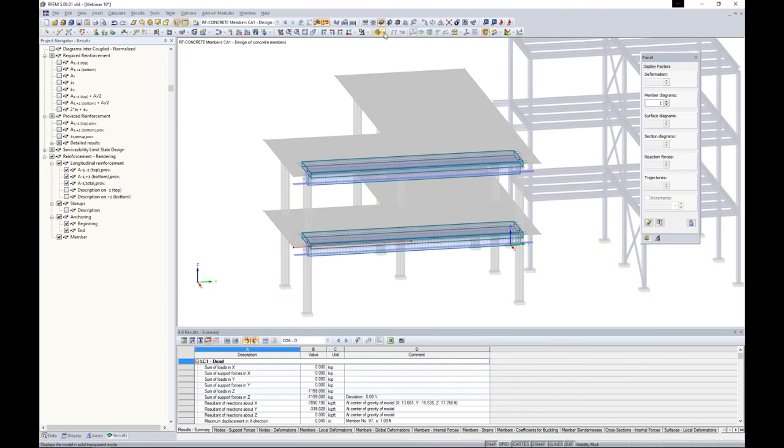So again, breezing through this add-on module, I have an entire previous webinar that I dedicated to only column and beam design for reinforcement. I also did another webinar that was strictly for surface design, reinforcement design according to the ACI, which I would encourage everyone to take a look at if you're more interested in those capabilities.

So the last thing to show you before I sum up this webinar is our printout report, rather quickly. Up here at the top, we can view our printout report, and the program's now cycling through to create that printout report. What it's going to do is open up this completely separate application. I think our printout report is very, very powerful.

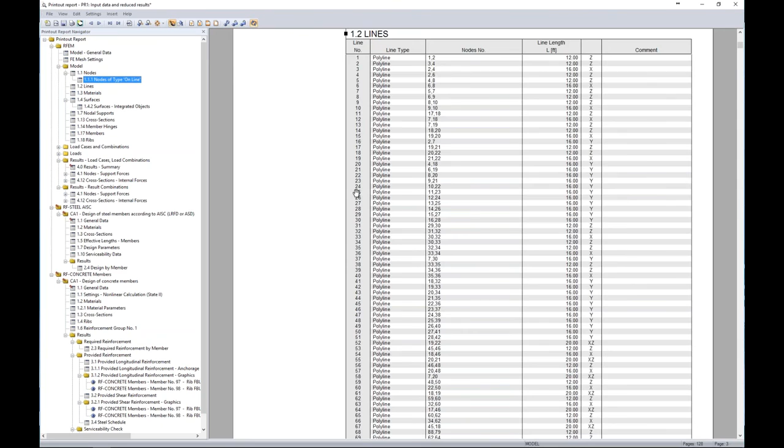You'll notice that we have our table of contents, which looks very similar to our project navigator back in RFEM. As I scroll through these different options and maybe zoom in to view this a little closer, well, the program's going to update my graphical view as I click on the table of contents over here on the left. I think everything is laid out quite nicely in terms of the different tables.

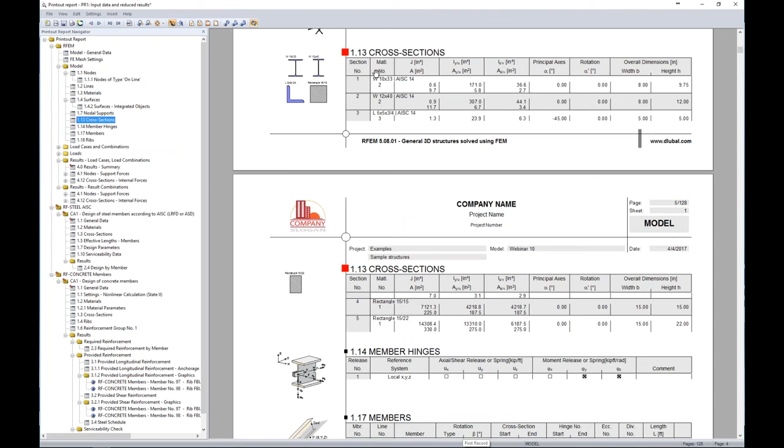For example, if we scroll in here to cross sections, you have a nice little picture showing you all of the different cross sections that were utilized within the program. If we take a look at member hinges, we give you a little picture here so that your engineer reviewing these calculations won't have any question about which axes were released or which weren't - that picture will be helpful for those review engineers.

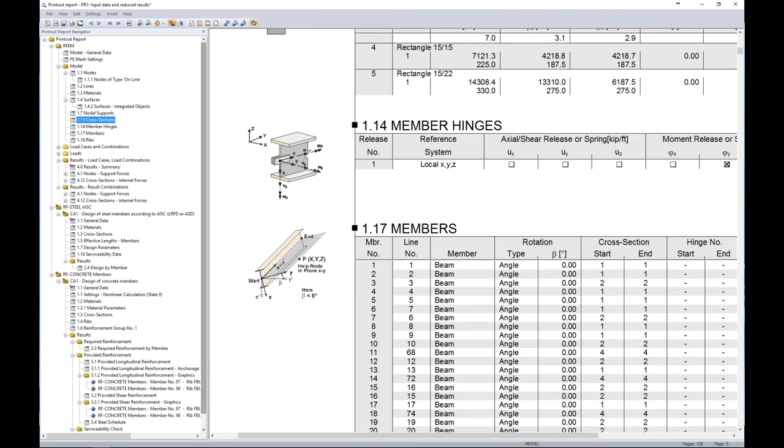We even have our add-on modules located down here on the left, which you can always move around or reorder if you'd like. And for our concrete members, we automatically create a nice picture of our reinforcement, which is a nice touch to the RF-CONCRETE add-on module.

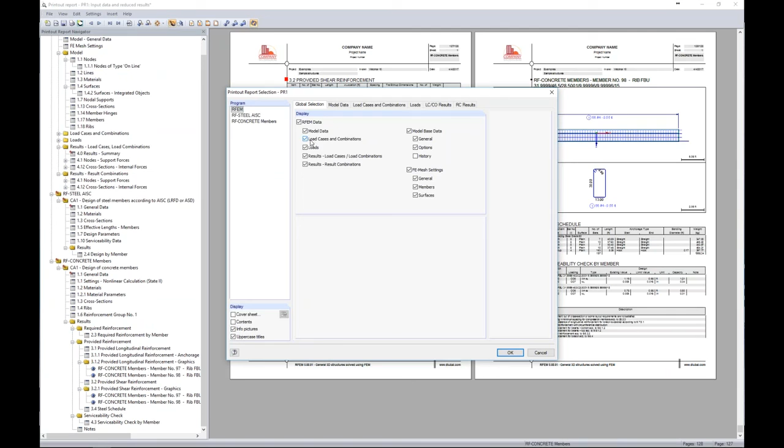You can add your company logo here too. Very powerful, and I think it's laid out quite nicely. Under Settings, Printout Report Template, Edit Selection, we can always control what we are and what we are not seeing within this add-on module.

The last thing to show you, let me exit out of this—of course we always want to add pictures to our add-on module. A nice feature is if we select this column line and show visibility by our selected objects here. I can zoom in, and I'm going to jump to one of my load combinations.

Here I'm going to display my support reactions, and I'd like to print off this picture, but I'd like to do it for all of my load combinations. We have a nice feature: if I go to this print graphics option up here, we have Mass Print.

When I go to the details of my mass print, you'll see we have 3 different tabs here, but right now the program is suspecting I'd like to view what's already turned on, my support reactions, because that's what I'm viewing graphically in RFEM now. I can choose the option to print off all load cases and combinations at once.

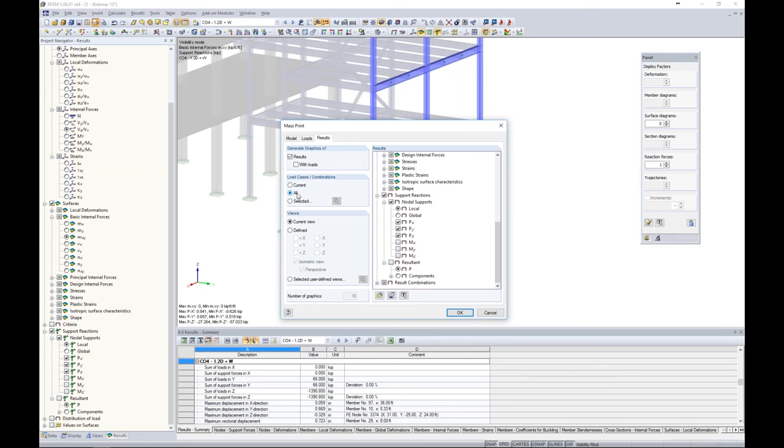So what does this do? When I click OK, the program takes this exact view I'm looking at and cycles through all of the different load cases, load combinations, and result combinations to show me my different support reactions in all of those scenarios.

It automatically creates those pictures, exports them here to our printout report, and now you'll notice I have this little list in my table of contents of my support reactions.

If we zoom in, once this loads, you'll notice that as I scroll down through these, I have load combination 1, load combination 2, 3, and all of those support reactions are automatically generated.

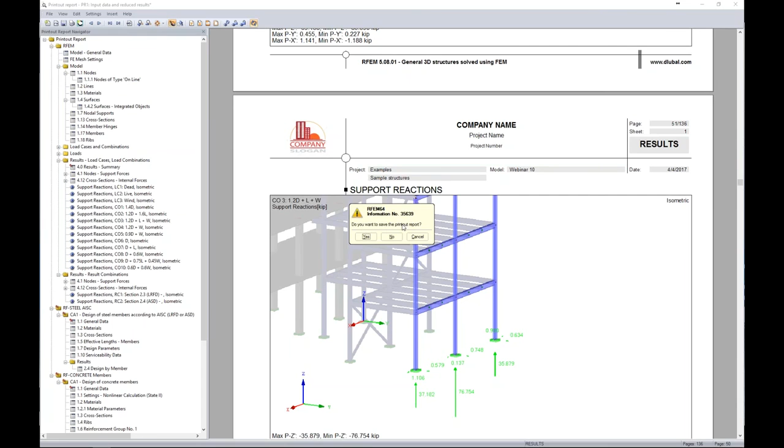It's also a nice feature that if I go back and make any changes to the add-on modules, or basically to the structure in general, these pictures will be automatically updated, so I don't even have to worry about reprinting them. Just another useful feature rather than sitting there printing off each individual picture yourself.

Now we are ready to sum up the webinar today. I know I flew through a lot of that. I just wanted to give our new users a basic introduction to the program and the add-on modules. We have much more information on our website at dlubal.com on both RFEM and the add-on modules.